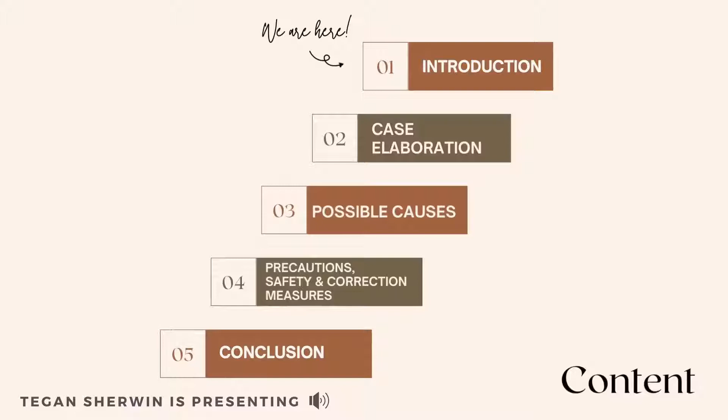For this case study, our group has chosen an article with an incident involving scaffolding collapsing in the middle of a construction site. Based on the article we used for this case study, our group will determine the possible causes of faults, propose befitting precautions, safety as well as correction measures for the incident based on our knowledge that we have learned from this course.

An incident occurred in Sungai Buloh, Selangor on 19 June 2021 that involved a construction company. According to the article, a metal scaffolding of a highway from Sungai Buloh to Kota Damansara, an expanse of the Damansara to Shah Alam highway also known as DASH, which was still under construction, collapsed around 7:14 p.m. on Saturday. Luckily, only 2 workers between the 20s and 40s during the time suffered light injuries and no involvement of any public users of the highway since the incident occurred in a confined construction site.

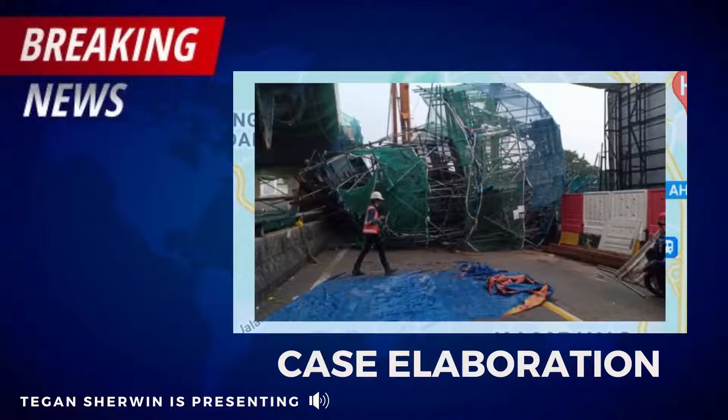The rescue team arrived just on time after the incident was reported 13 minutes later. The incident was confirmed by the developer of DASH, Project Lintasan Kota Holdings, Pro Lintas. The emergency response team from DASH were at the scene during the time to handle the traffic and cleared the remains of the collapsed scaffolding, and both workers were brought immediately for treatment at Sungai Buloh Hospital as a stop work order was issued after.

Before the incident, the 2 workers injured were on their duty just below the 12-meter tall construction site, as said in a report by Norazam Khamis, Director of Selangor Fire and Rescue Department. Lastly, the developer and main contractor involved has decided to give full cooperation to any parties for investigation regarding the incident.

Based on our observation of this accident, we could identify that the main causes for the scaffolding to collapse is because of technical factors, environmental factors, and organizational factors.

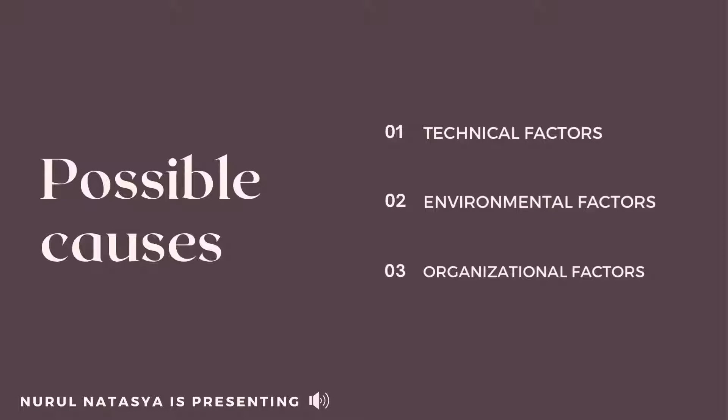Firstly, technical factors are one of the major causes of the scaffold to collapse. Based on our observation of the situation, design failure may have caused the scaffold to collapse. The design probably was changed without consulting experienced designers or engineers. This will result in the scaffold fail to properly secure and collapse.

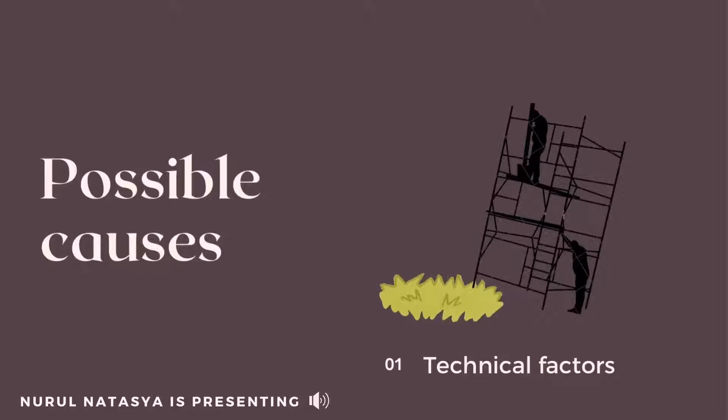In addition, the scaffold may not have enough strength and stability. Along with the highway conditions, the scaffold may be placed on an unsteady surface and improper installation such as exceeding height standards. As a result, the scaffold was unable to withstand bad weather, especially strong winds, which caused it to collapse. Besides that, overloaded is an additional reason for the scaffold to collapse.

An overloaded brickfield platform may exceed the maximum weight limit of scaffolding at the construction site. This will result in the condition of the scaffold was not safe and not suitable for the construction site because it does not meet the requirements along with being incapable to support the loads. Therefore, that is the reason the scaffold probably collapsed due to overload.

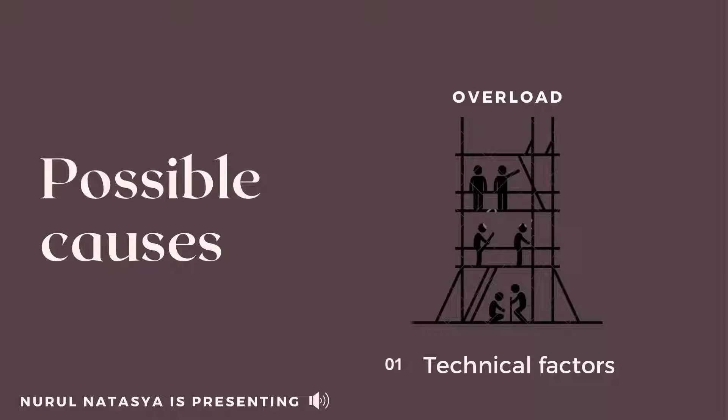Next, for environment factor, changing environment condition can contribute towards scaffold collapse over time. In this case, the scaffold may not be able to withstand the wind load and cause the scaffold to collapse. As we know, weather changes can be highly risky when working at the height of a partially constructed building.

Lastly, for organizational factor, it is possible that the scaffold may not have been properly inspected or maintained. This accident might have happened due to the negligence of the responsible workers that failed to ensure the scaffold was safe to use and monitor the scaffolding condition before and after conducting the work.

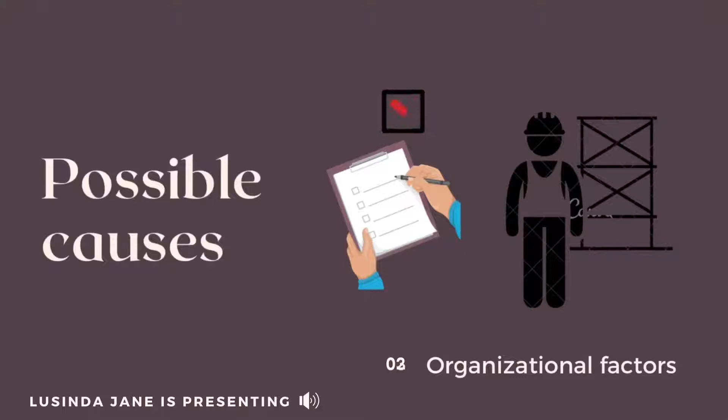In this article, the responsible worker may be unaware that the scaffold might be constructed using a defective material, or the component of the cross braces might have become loose or missing due to inadequate cross bracing. As a result, due to the negligence of the responsible worker, the scaffold easily collapsed as it was not able to stay much longer due to the defective material and the missing or loosened scaffolding components.

Accidents that happen on the construction site are unpredictable as it can happen at any time. Thus, accidents can be prevented by following the steps of precaution where the accident can be minimized and prevented from happening. These are the steps of precaution that can happen to prevent the accident from the article happening again.

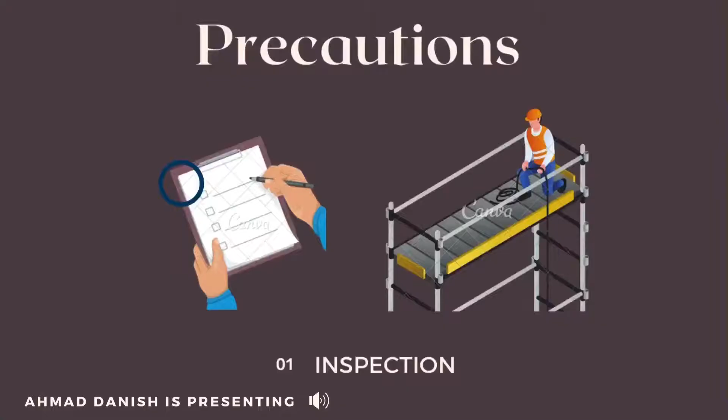First, by doing an inspection on scaffolding. Site supervisors are responsible for monitoring the scaffolding during, before and after work and ensure it is safe to use and follow the safety regulation. For example, check and tighten the bolts of scaffolding to prevent any loosening.

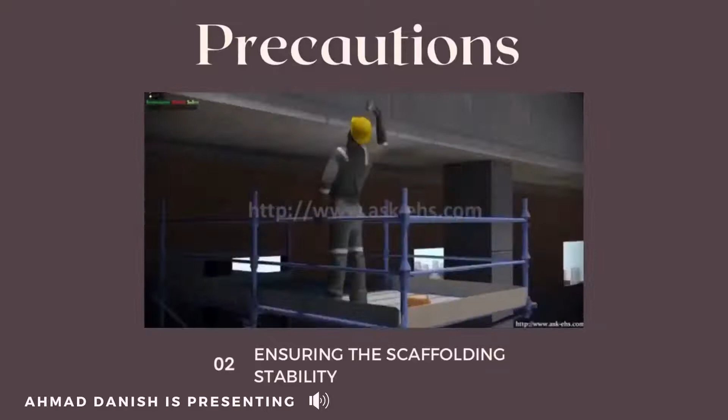Next, ensuring the scaffolding stability. As we can see from the article, the scaffolding was not strong and stable enough, hence it was one of the major reasons it collapsed. Therefore, it is best to install sole boards and base plates at the bottom of the scaffolding in order to get a level base. Site supervisors and workers must also ensure the ground conditions are stable enough for a safe work environment.

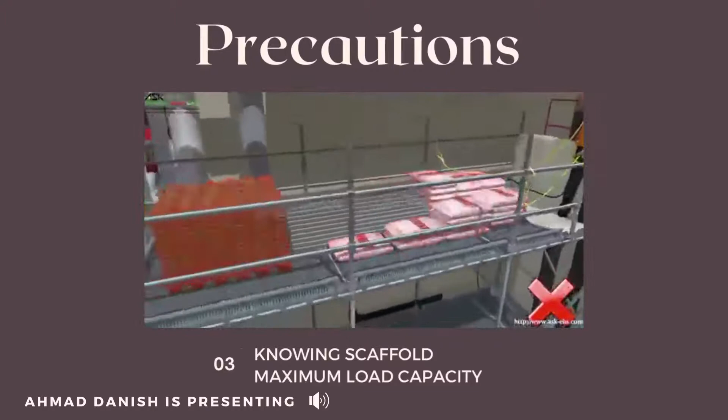Other than that, the responsible workers must ensure the scaffold does not exceed the maximum capacity for the scaffolding, which may lead to collapse. The workers should be aware of scaffolding materials before installing and using them. For example, damaged and rusty scaffolding should not be used again as it cannot support the loads.

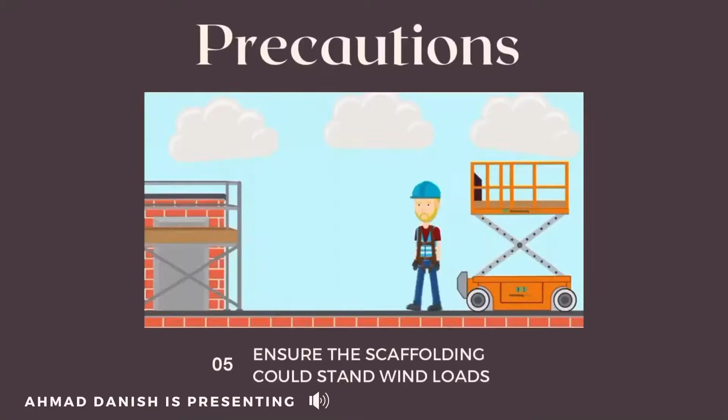Other than that, the workers need to ensure the scaffolding could stand wind load. This is because strong wind could lead the scaffolding to collapse as it cannot hold the stress of strong wind. Therefore, the workers could provide additional support for the scaffolding as it can give better and more strength to the scaffolding.

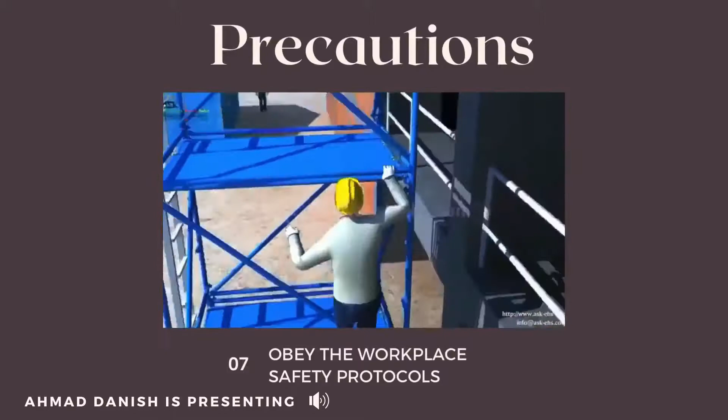Last but not least, the workers must obey workplace safety protocols in order to prevent any accidents and injuries from happening. Working at a site with scaffolding might be dangerous since it involves height. It could be a fall from a high level of scaffolding or an accident with a collapsed scaffolding, and more.

Based on the article, there is a problem with the scaffolding that made it collapse and injured two of the workers. From this, we should take safety measures to reduce the risk of worse injury caused by a collapsed scaffolding.

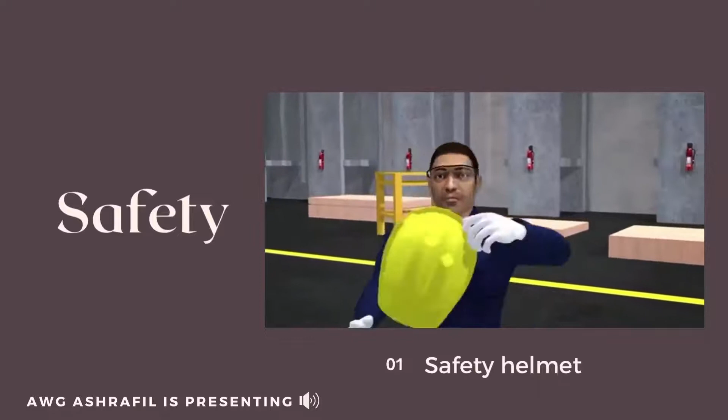First, by wearing a safety helmet, it could give a worker extra protection on the most important body part. As we can see in the article, the scaffold collapsed and injured the worker underneath it. By taking safety precautions with using a helmet, it could reduce the risk of fatal injury on the head that could lead to death.

Next, site workers should wear safety goggles when working near scaffolding too. It does not matter if they work underneath it or on top of it. If anything worse happened just like in the news, it could protect the workers' eyes and reduce the risk of getting blind or losing their eyesight.

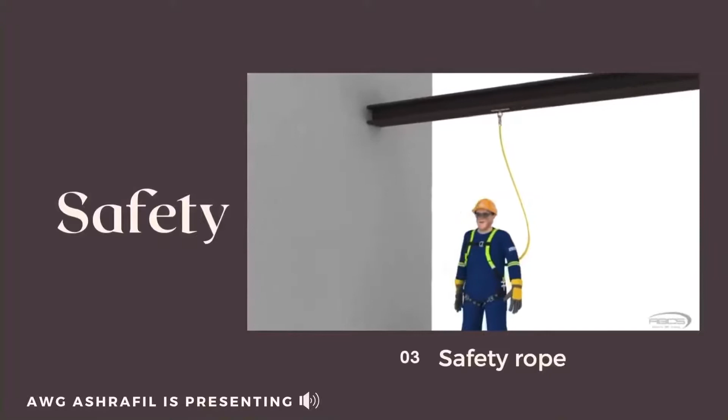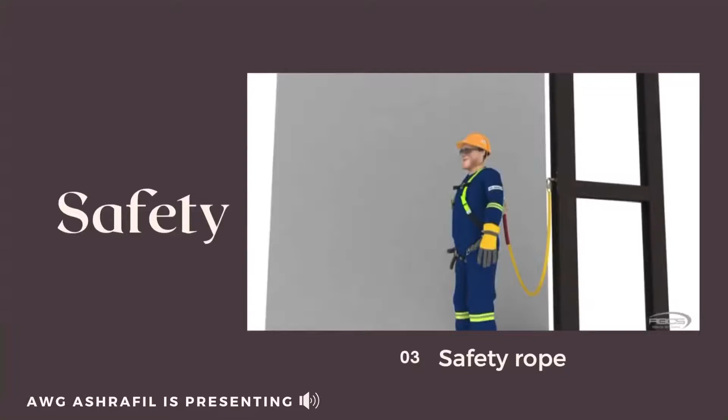Lastly, when working with scaffolding, it must be involved with height. Safety rope is the best safety equipment when working at height. When we are using safety ropes, it could protect the workers from falling from a high place, and if the worst case scenario such as collapsed scaffolding happens, the safety rope may have a chance to save someone's life by minimizing the impact force.

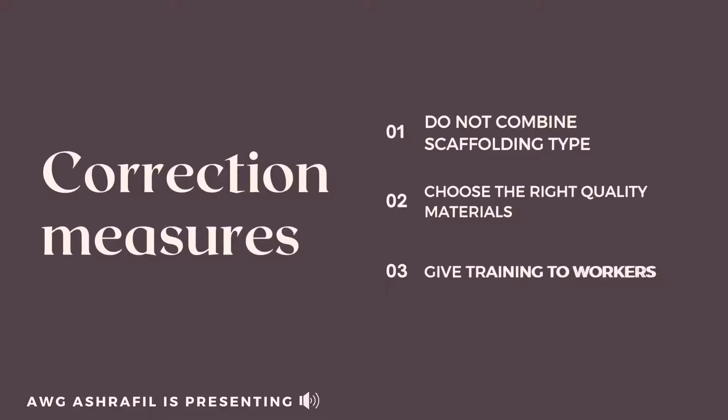When the cause of the accident has been investigated, it is important for us to do corrective measures. Corrective measures will make us learn and improve from our mistakes and make sure it will not repeat next time. Here are some corrective measures that can be made based on the accident in the article.

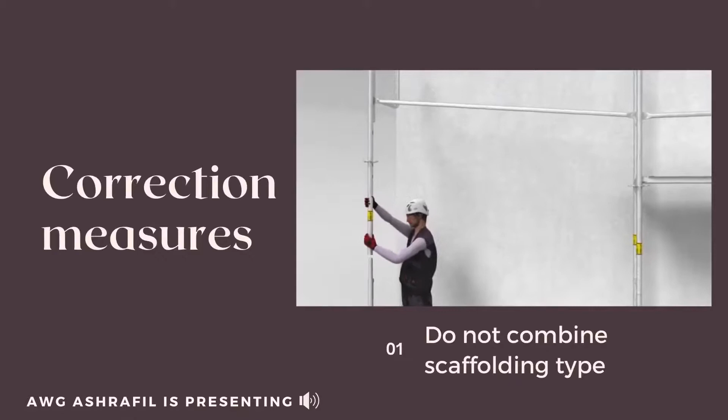First, do not mix and combine scaffold styles because it can lead to an unstable and dangerous scaffold. Instead, build a scaffold individually based on its design and type so it will be safer and more stable to use. It is important to know the right scaffolding to use at a site.

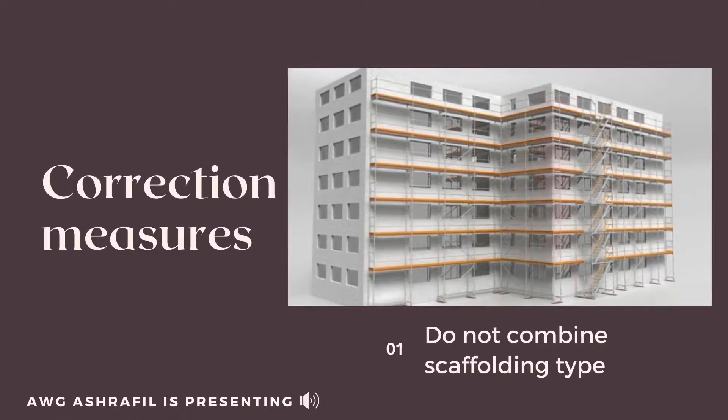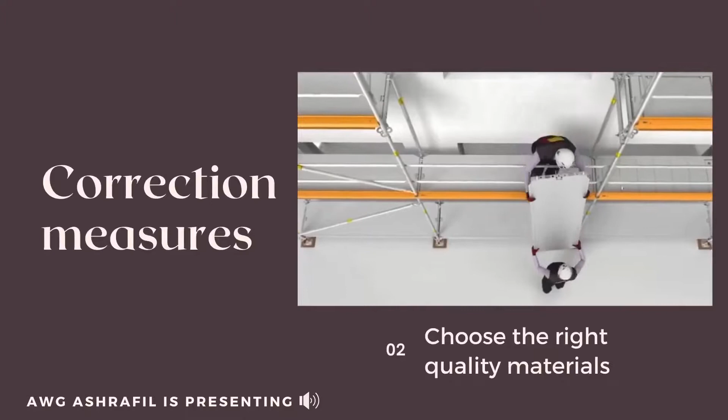Next, use good quality scaffolding material. It is important to select good quality scaffolding as this will affect its strength when used by a worker. Never use a rusty scaffold as this will have a great chance of collapsing.

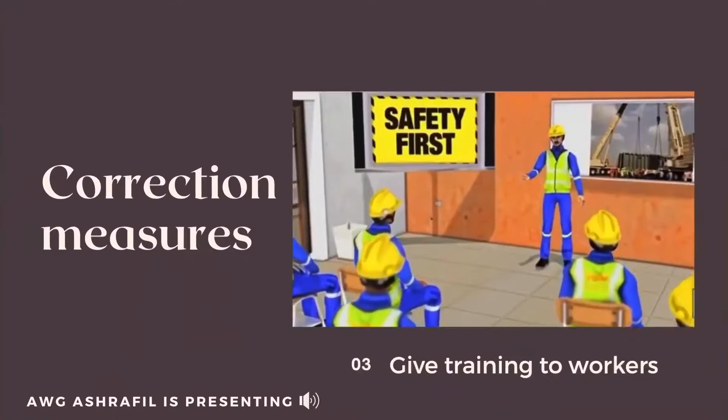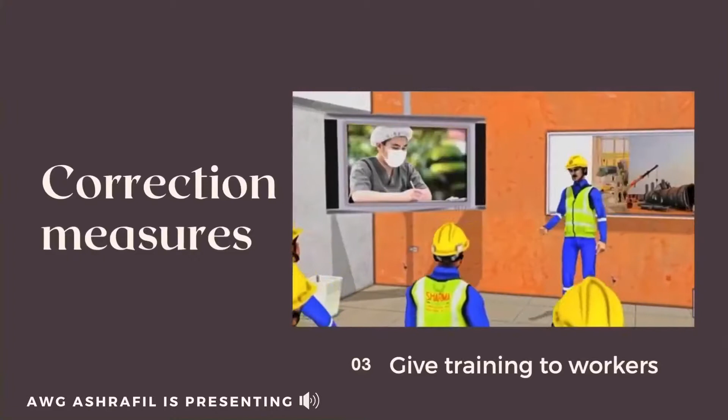Last but not least, ensure proper training for workers. It is important to ensure all workers are already trained with scaffolding. This will give them more experience on what to do to make a more stable and proper scaffolding on site.

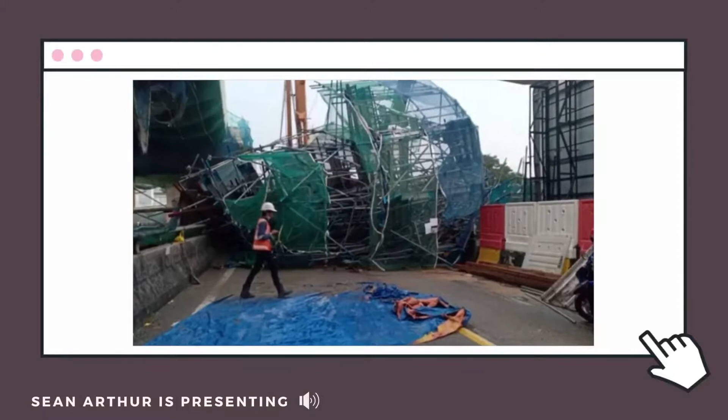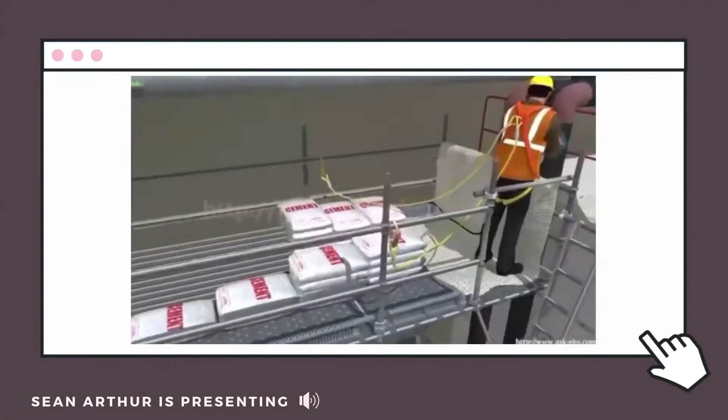As a conclusion, accidents involving scaffolding should be taken seriously in the construction industry. Based on our analysis, we can find that there are a lot of possible causes of the accident in the article we chose. The most common factors of collapsed scaffolding are environmental factor, organizational factor, technical factor, and human factor. In order to prevent this accident from happening again, it is important for us to practice precaution, safety, and corrective measures of the scaffolding.

By practicing corrective measures, we can find the causes and their solutions so it won't happen again next time. We want to adopt corrective and preventive action to ensure we can reduce and avoid repeating mistakes that could result in even worse outcomes at the construction site, such as accidents that could lead to fatal injury and death.

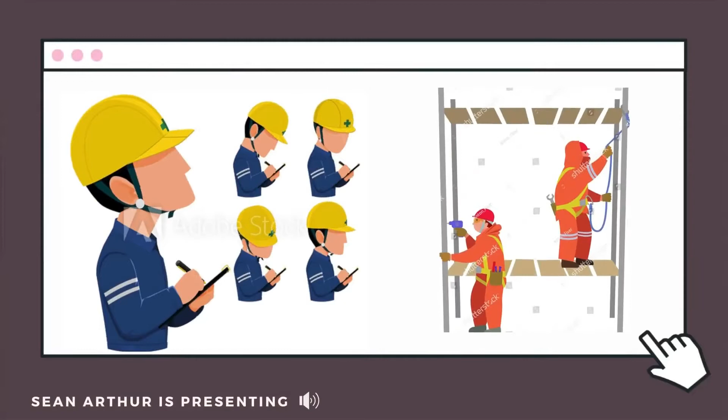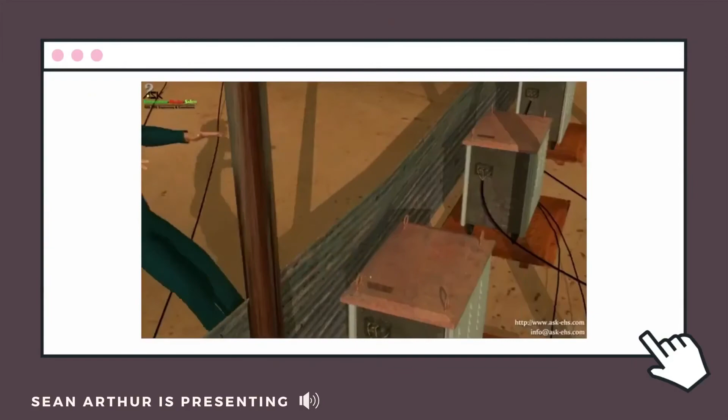In addition, proper inspection plays an important role in order to complete the project smoothly and to ensure the safety of all workers by preventing and reducing accidents and injuries. Not only that, the workers must give full cooperation by obeying the workplace safety protocols and following OSHA's construction standards in order to prevent any accidents and injuries from happening.